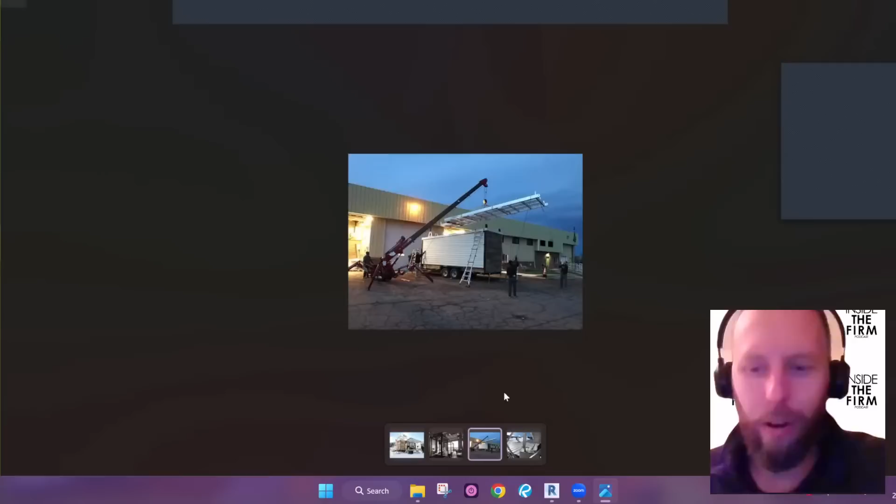Here's the modeling of those connections right there, and here's the crane that we rented. Fitting inside of these brackets is like a 32nd of an inch tolerance.

It's so funny to continue that story because I think it's important. After this, we had enough money to buy land, because our idea was that we designed a whole bunch of multifamilies, so we know how to do townhomes. So we did 8 townhomes at our own headquarters.

We were going to build it ourselves, and the banks were having problems because they're like, you guys aren't really builders. Finally they said, yeah, you can build it as long as you don't rent a crane and do anything like that. We just looked at each other and laughed, like, oh, we do that kind of stuff all the time, but we won't for this project.

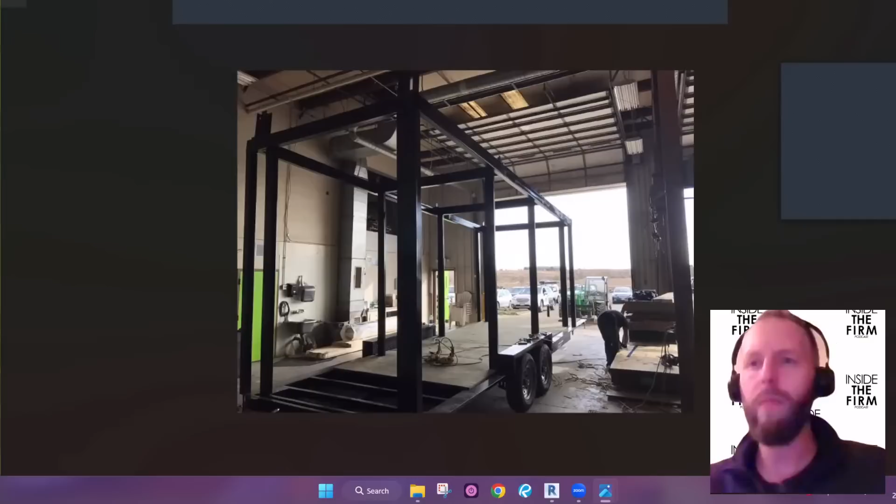And here's the structural frame of that project. But what I'm getting to is, essentially, we thought that after we built our headquarters and the 9 other units, it's like, okay, after we do 9, obviously we're going to do 18.

And then obviously we're going to do 36 after that and keep growing. The problem, especially for all the architects listening here, is that if you go through any development bigger than a house or a duplex, you go through site plan review. At least if you're in any major city—if you're in the county, that's different.

That's a year-long process, and it actually took us a year and a half. Then it was a year to build, and then maybe 6 months to close or sell out. So you're talking a 2.5-year process. And we thought—it's risky because we had to put up a substantial amount of money to make this happen.

And also there was a flood—literally one of our units flooded right before it was done. Extremely stressful, just crazy, the stress was unbelievable. The amount of work, like getting up at 4 and getting home at 7, which doesn't seem late, but being out in the field while trying to run a firm and manage construction for like 90 days straight is not fun.

So we looked at that and thought, hey, if we built 4 houses in a year—which we don't at this time—we'd make the same amount of profit, plus there's no risk. We aren't taking it on because it's our clients, our architecture clients, that we're turning into construction projects. So we totally pivoted, just for sanity, monetarily and for security—they're taking out the loan and all that.

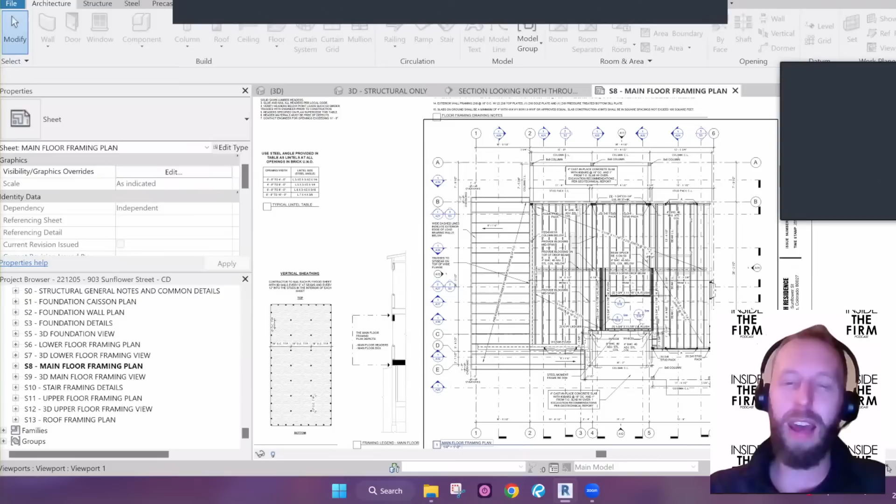What we did to enhance and bring that out is think, okay, how do we start to convey that even more? Because honestly, a lot of baby boomers are retiring, and that knowledge is going away. And where we're seeing it the most is we used to only be really mad at the planning department because they were so illogical. But now it's getting more in the building department, and what we've noticed is, hey, Frank, who's been there for 40 years, retired, and now there's two younger people, Alex and Jeff, there.

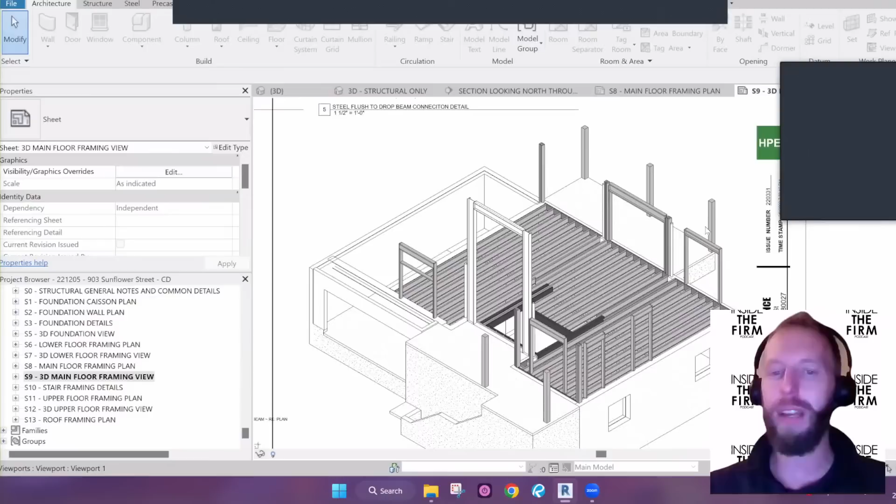They barely know anything, so they're asking you to literally put the whole IRC on the drawings, or just random parts of the IRC, or to explain how you comply with random parts of the IRC. You want to shake them and say stop this nonsense, right? But what I'm getting at is that's probably not only happening there, it might be happening in the field too. So anything we can do to essentially show that in 3D in a more simple term, sometimes we'll even label it. Like, here's your joist, here's something different because it's shaded differently, and here's your major load points coming down. It makes more sense, it easily makes more sense. I think I have another example, but it might take a while to pop up.

I think it changes when you start thinking about how it's being built, and the intent of your modeling shifts from design intent to construction intent, and how you not only model it but how you show it.

That's a great example right there, just that 3D view. Simply adding a 3D view to a drawing seems bizarre, but the next step is obviously getting the models into the hands of the contractors. At least at a minimum you can get them on the drawing so people understand the design intent better.

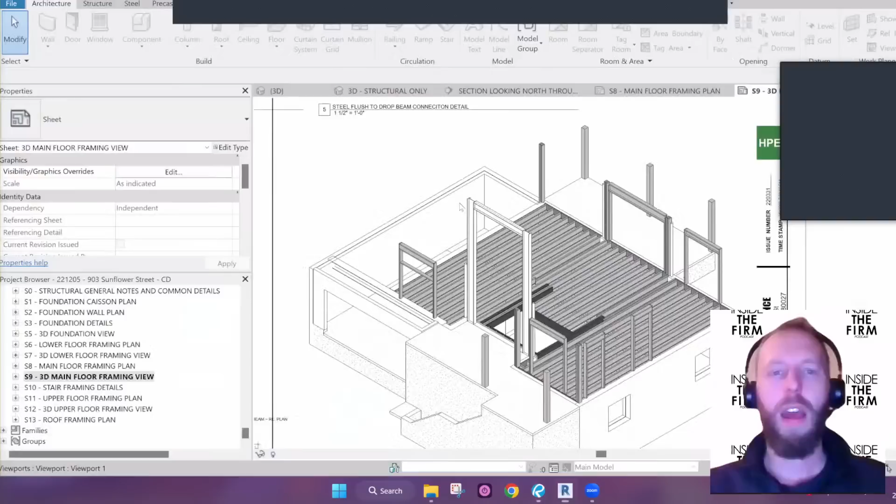It also helps too. What we found was we now have a laser scanner, and we never went and bought one of those $20,000 or $30,000 ones. We got one that was like 5,000 some hundred, plus the stand and some other things. We had a whole podcast on it, so if you search inside the firm about laser scanner, it'll go over all the equipment.

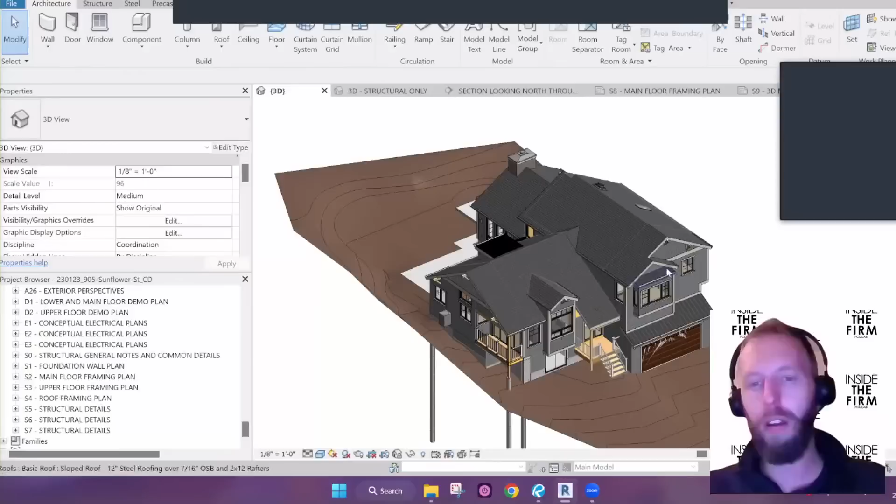And what I'm talking about is, those frames not only help people out in the field, but help people inside the office understand. So Colorado had that fire, and a lot of things burnt down, and this is a house that's being rebuilt there. You have the footprint and you're trying to remake these people's lives. Let's hide the category.

You can see we laser scanned it, and then we asked Rebecca - I know this is going to be painful, but model all the remaining roof trusses, just like the lasers show where they are. This is probably just generic modeling, not super advanced. I don't even know if we categorized it correctly.

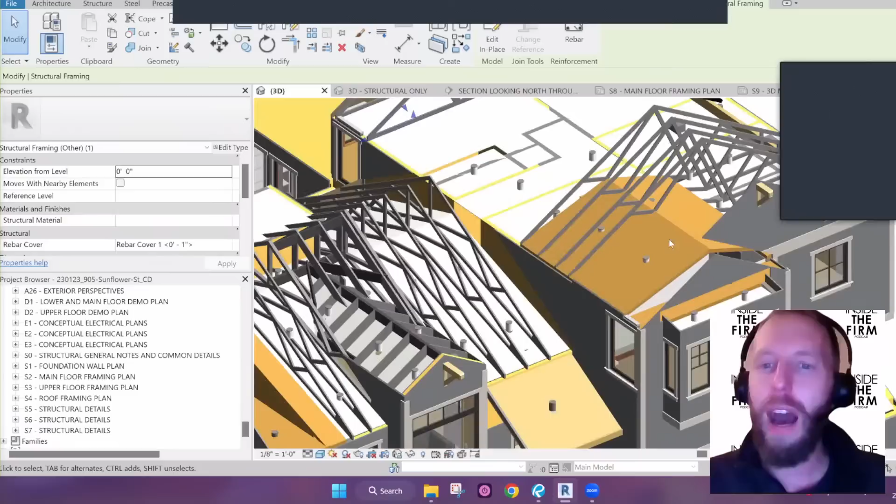But now when we're putting in our ceilings and seeing how the stairs go from here to there, we can see, okay, this is what's left, this is what we're going to keep, the rest of these trusses are gone. So if we did want to vault in here for whatever reason, we could have. But just taking that level, going into there and showing here's what's left, here's what's new, it helps visualize everything.

It's funny because I have these conversations on a daily basis, and at the end of the day, if we're going to talk principles, I think the principle is, especially at this scale of construction, you'll never regret modeling too much in this sense.

Understandably you might want to draw a line at some point. You don't need every nail and every screw and every bolt necessarily modeled in most conditions. Maybe there's very specific timber or something where you want that kind of thing. But you'll never ever regret modeling too much, and it doesn't take that much effort.

Like, yeah, you said they have the trusses there, right? But there's scissor trusses, they're probably very similar along there. Honestly, that was probably a couple hours to model those trusses, and now you've got the information. How valuable is that information?

I have this conversation all the time when it comes to existing conditions - how much should we model for existing conditions? As much as humanly possible, I think, right? Because you're never going to regret having that information, whether you use it or not.

A couple of other things that happened - this might be standard practice in other firms, but since Lance and I were at other firms for such a short time, we developed our own system and continually asked the field. So the electrical person said, especially for houses - well, I'm sure this is more common on bigger projects - but for houses, a lot of times the power plan and the lighting plan will be on the same sheet. He just asked us to separate it, so it's like, okay, we can do that.

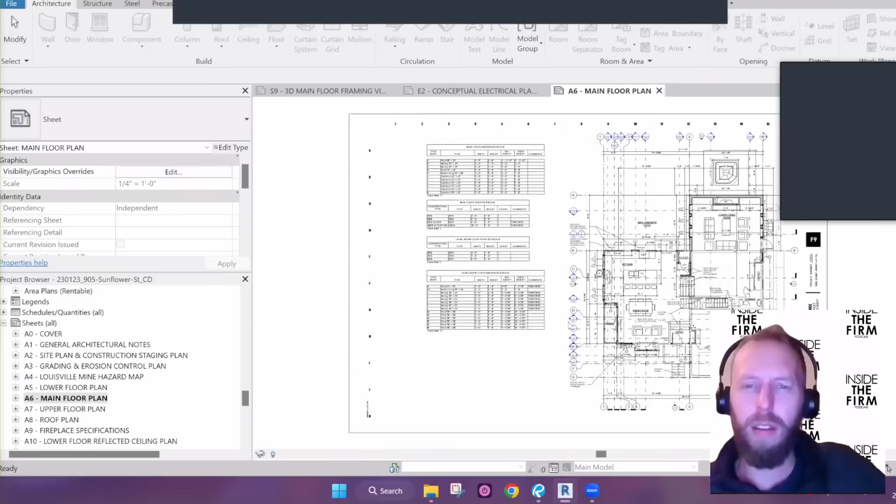Another thing too, let's go to the main floor plan here. This is how we dimension - this might not be the best example, yeah, it's probably not. Essentially, we dimension not from center lines, but from exterior face to exterior face, because that's the way our framers essentially like it. And to go a little bit further, there we go.

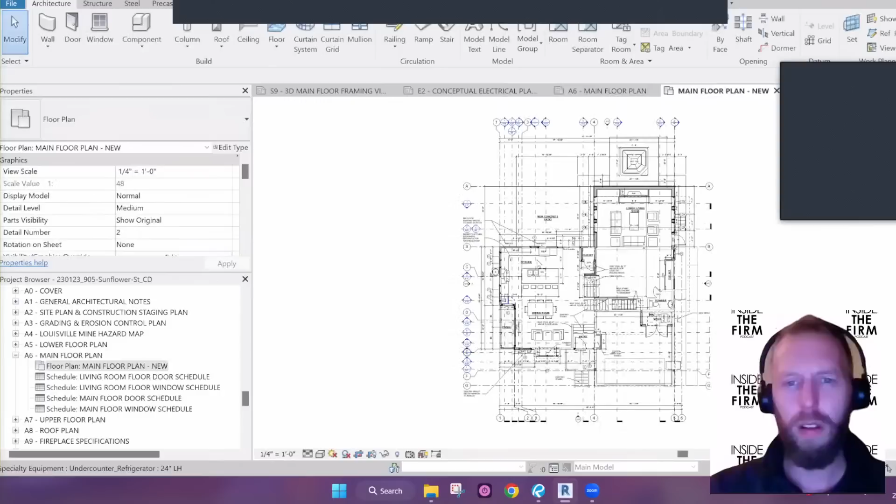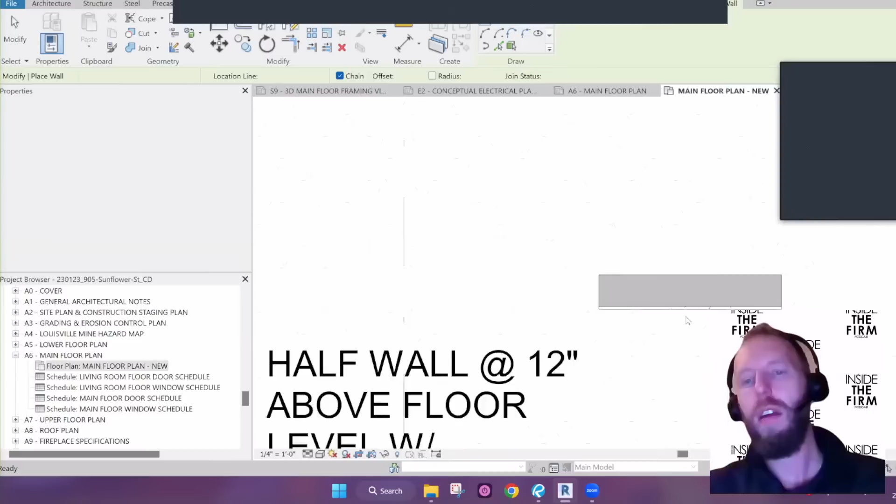Okay, so for our walls, how our walls are broken up, you'll see that we'll have essentially an exterior framing wall because we're mimicking construction, right? We happen to put the gypsum layer in there, but it's just the framing wall and the gypsum layer. And then we don't have the sheathing and everything else on that layer.

And also the sheathing goes down over the floor box. I know you can go into section and change it and play with that, but if it's already separate, it's easier to make it go where it's at.

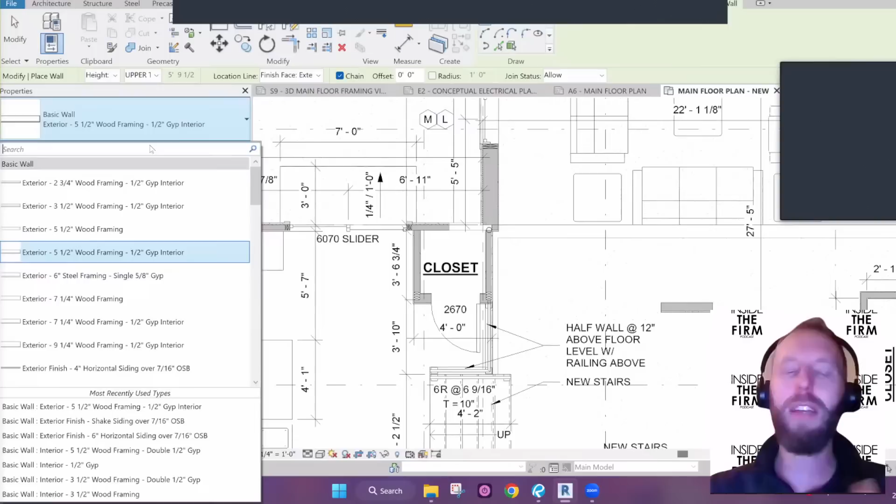So then we have exterior finishes. And the same thing is with floors, we have our regular floors and then our finished floors and things like that.

Maybe this is becoming more standard now, but like 5 years ago, especially from our podcast, we got a lot of people... Nick is a guest on our podcast, he always does Nick Reads, he's an architect in Florida and an awesome one. We finally said, hey, he was trying to teach people and didn't have time, so I said just go to Revit Rocket Ship, here you go, train them. Then he watched it and said, holy shit, I've been using Revit wrong for 9 years.

No, that is becoming more common. Starting to see the walls being broken up into layers for a lot of reasons. Maybe it's because you don't want to make the decision yet, maybe it's because of the actual constructability and order of construction, maybe the way you want to do takeoffs. It started with brick and masonry facades especially, because it was ideal to do it that way so you could really control the returns, the weeps, the shelves, and all that stuff.

But I'm seeing more and more of it, and it doesn't really change the workflow all that much, which is the interesting part. A lot of people get nervous because you're drawing 3 walls maybe instead of 1, but all you got to do is select the 3 walls when you move them, and it works just like the 1 did.

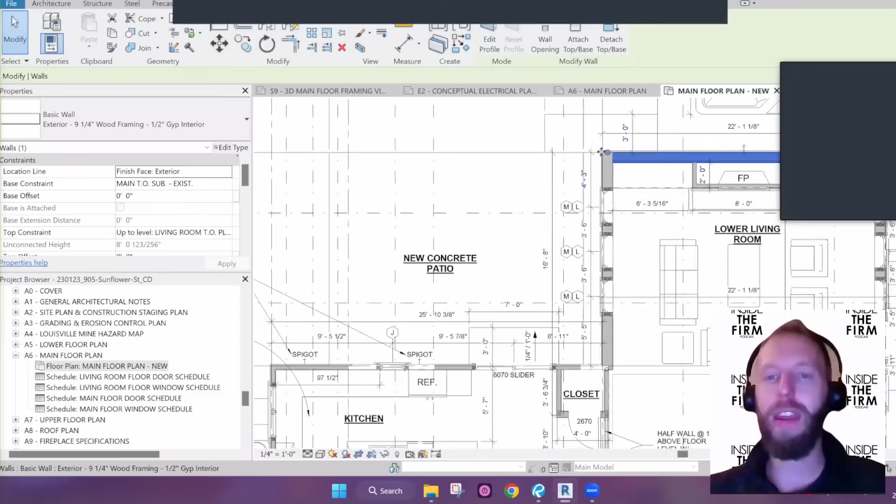So it's not as bad as they make it out to be, and a lot of times especially for exterior, it's almost a no-brainer. A lot of times we have the client kind of cement the floor plan in schematic design where we only have those walls, so it's easy to pull the dimension to that wall. Then in design development is where that wall finish gets talked about, because the massing is where it matters. You could have a massing with a projection that has stone or metal or whatever, and all of them could look good if the massing, the bones, and the windows are all right. So we don't apply that skin until halfway through the project.

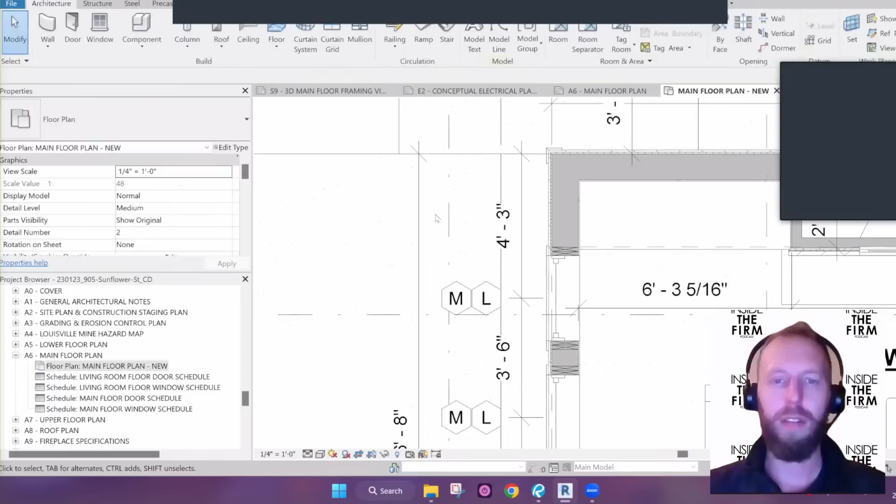Since you have this up and you're zoomed in right here, I'm curious, showing the studs at all the openings, is that something you took away from field experience as well, or where'd that come from?

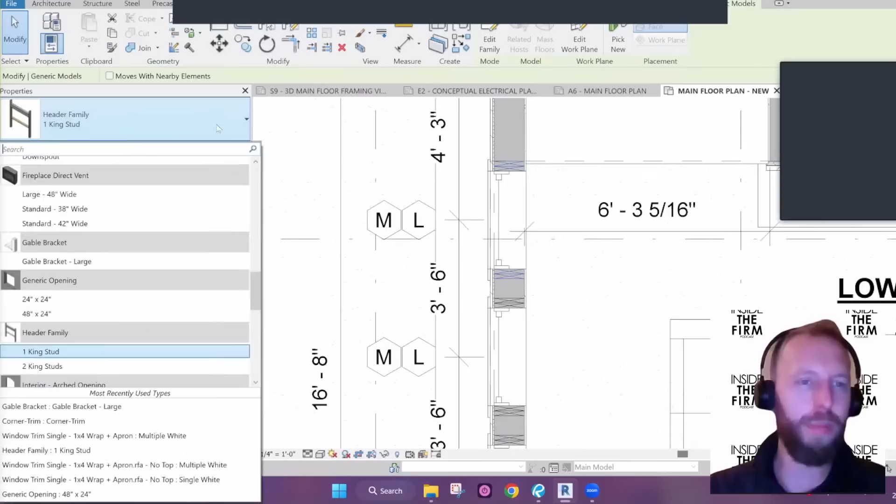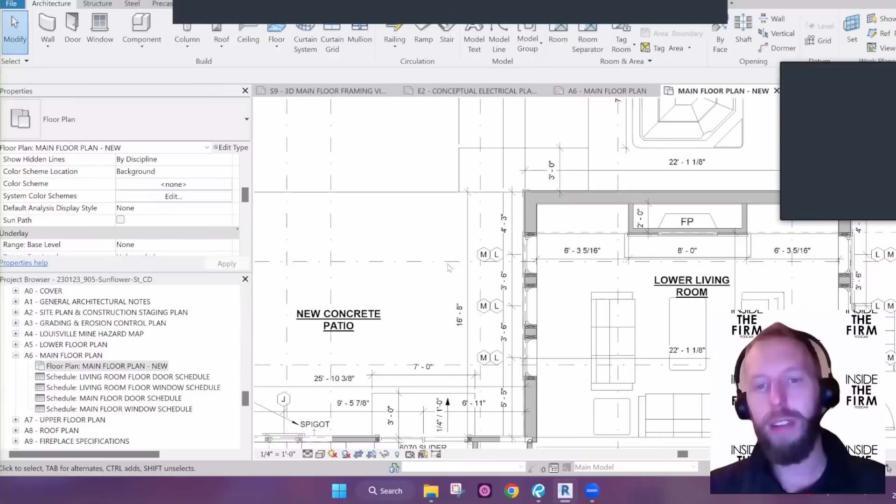This came from it, yes. So sometimes we do our structural plans, and sometimes it's farmed out. But when we do them, and when we're putting in the header, we have a family, and that family has different options, two king studs, stuff like that. It's flexible, it's parametric, and now that it's physical... what happened was someone put in, somehow it got missed that the header in some window or over some doors was 12 inches and we only had 8 inches. Now when it was just annotated, it's just annotated. So now if you cut a section through here, which there is a section through here, right?

Whew, look, that one barely fit. Good for us. There it is. You can see it, and you can see if it was going into there or not. No, that's an awesome idea.

When I'm doing smaller additions, I'll model all of the studs, all the headers, all that stuff. But it's a great approach to only do openings in specific areas, knowing that in between are studs at 16 inches on center for the most part. Yep, it does make a lot of sense.

I've never thought about building that header family like that, where you have the king stud, the plates and everything, and then you can just bump it around. That's an awesome idea, that's a cool tip. And a lot of the team is more in the Revit models than myself, because I am pretty sure that this model, or a model similar to it, when you flex the size, it automatically flexes the header.

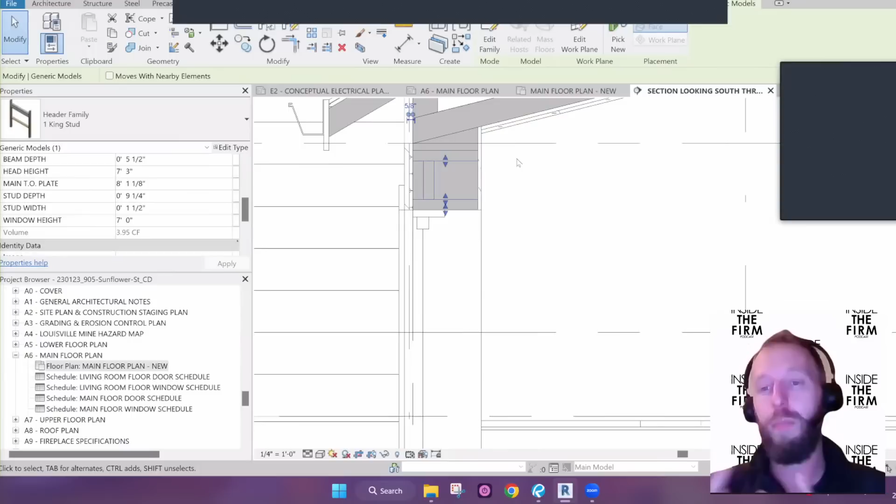And here's what I'm getting at - it's not that it's necessarily correct, but it's that, hey, let's say you're putting these in and the engineer is going to review them later. If you went from, let's say, 4 foot to 12 foot, it should automatically get somewhat larger. And from our experience, we know that's going to be 3 LVLs or 2x12s or something like that. So normally it's pretty close, but that helps too.

Yeah, and again, that's another example of, you won't regret modeling it, because if it doesn't fit, you spin around that model and you're like, oh shit, what is this thing sticking through my plate at the top there? And you're like, oh wait a minute, that header's got to be 12 inches now.

That's great, and I can imagine that being very useful, having walked the site with framers many times on residential projects, realizing how valuable it is to point to them in 3D views, like how headers are constructed. What I'm going immediately to is, well, what if it's the headers up at the floor plate, but we're getting into the weeds there. I get it, the idea is brilliant.

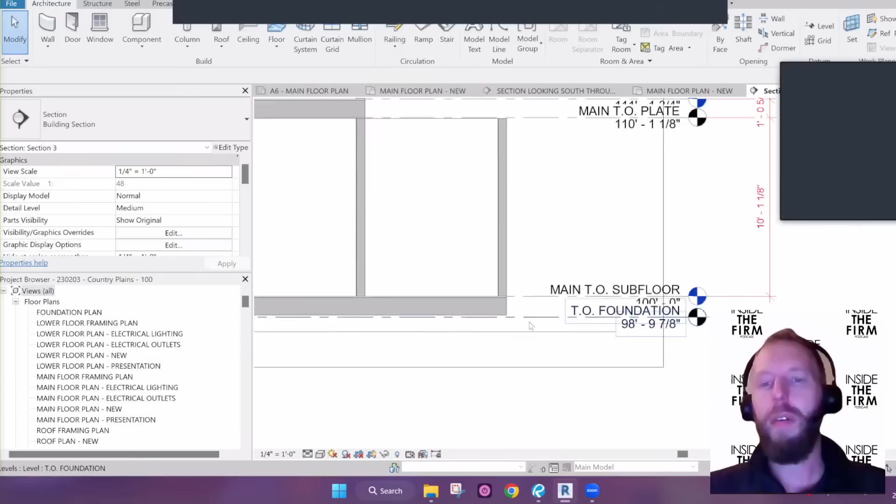Basically, we also have two levels here. Some people have one, we have two because this is where the walls go to, then the floor box fits in between. The reason why there's a gap here is because there's normally a concrete wall under here, and that's that base plate, mud sill, all that. So that's a little bit different too than I see when I get other architects' models.

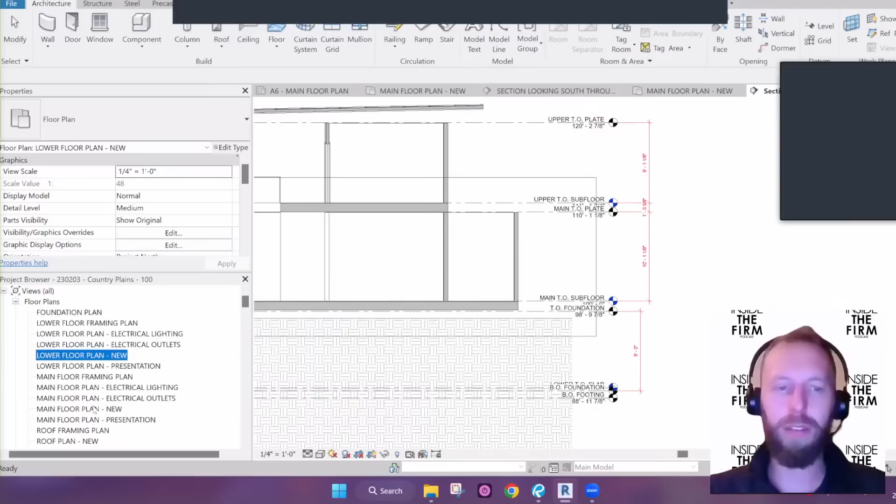Yeah, and exactly, there's validity to that argument too. I think you'll hear people go both ways, whether you need a level for that or not, and a lot of times it'll depend. But I think for strictly residential, if you're doing stick built wood frame construction, it kind of makes sense, because then you can control sill plates versus top plates and all that good stuff.

Yeah, I'm just reading some questions here. People are loving some of these tips, which is awesome. So no, that's cool, I think that proved a lot of what we were talking about there, and it's kind of cool to see.

So I'm curious, like, even just those examples we talked about, if you thought back 5, 6, 8 years ago, how differently did you guys approach, like, maybe producing a set and a model for a house like the one there? Would you say it was pretty different?

I would say the structural stuff really helped button it all up. And I think we are on the trajectory, because that first push of the 3 years got us to a good level, and then we were just flat. It's just now all of these little things are really adding up.

And what I'm curious at too, and not to flip the script, because I know that that's not always the coolest - but no, of course it is, come on, this is a live show. Yeah, to flip the script, how is AI now going to start to play into this?

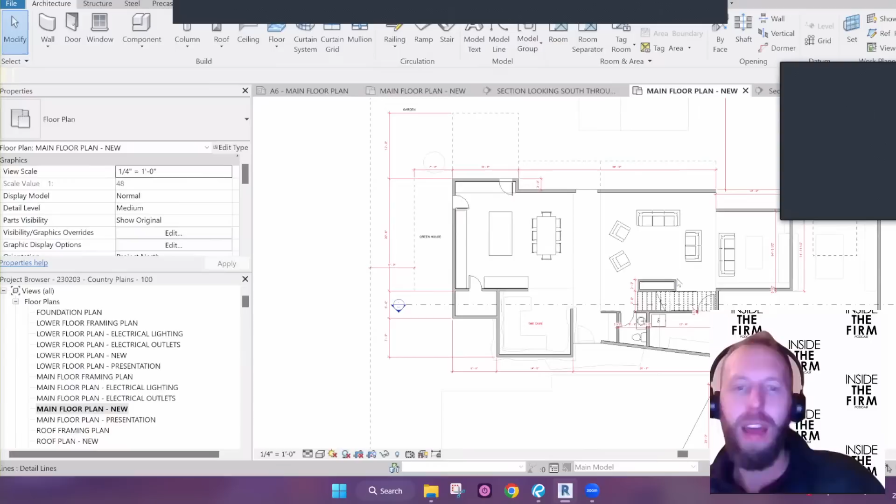After we go through a couple rounds, that phase is done, now we're in design development. Let's take a look at... here we go. So this still isn't fleshed out to give to the client, but there's massing, there's windows, there's not punching of windows yet or anything like that, but you can get a feel for it.

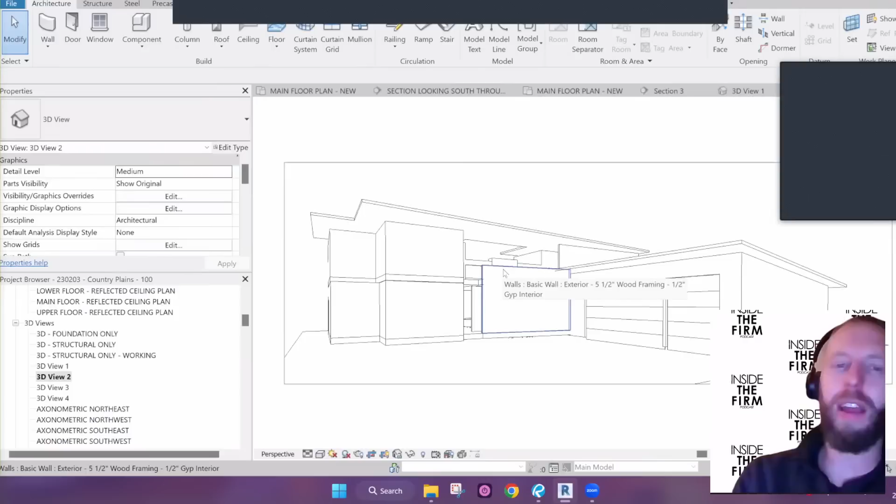Then in DD, now we're adding the skin wall and putting in more windows and stuff like that. We'll always put in some windows or leave some openings just to give them the mass void effect of what's going on. But in schematic design, there are no facade walls whatsoever, and very, very little windows.

So I would imagine that somewhere between DD and CD is when you would start adding in those structural elements we've been talking about, and some of those details, because now you're saying, okay, I'm starting to think the skin, the look is there. Now let's start putting the bones in and seeing if they fit, type of deal, right?

Yep, exactly. Awesome. Well, that was a good question. I forgot who asked it, so thanks whoever asked it. I think it was Karen, I think was her name, so thanks, Karen.